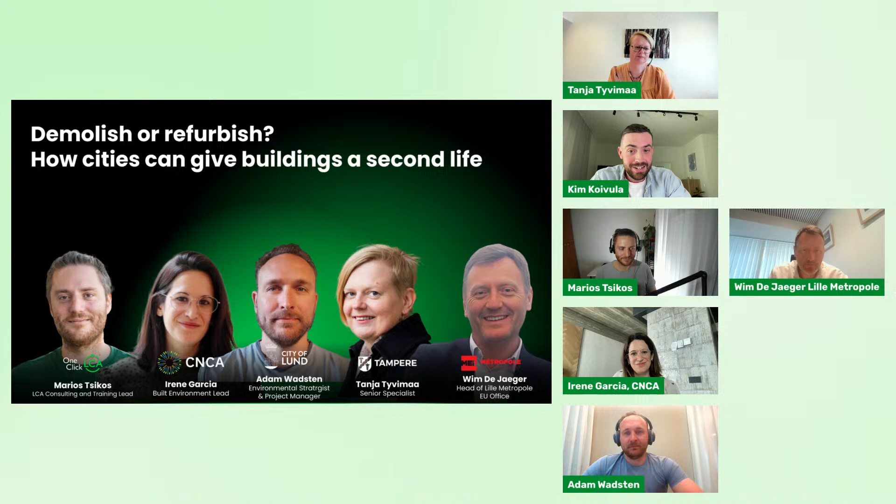Today, we're going to discuss how cities can give buildings a second life and talk about the different factors when considering demolishing or refurbishing existing buildings. We will also share the key findings of a report we've conducted together with CNCA and have a discussion around the policy outline of the report with all of our speakers. Now, to kick things off, we have Irene from Carbon Neutral Cities Alliance to give us an intro to this subject and set the scene for our upcoming discussion. Irene, please go ahead.

Hello, everyone. Thank you very much for attending this webinar. I'm Irene Garcia, Built Environment Lead of Carbon Neutral Cities Alliance, or CNCA, as we usually go by. We are an alliance of cities which have committed to cut emissions by 80 to 100% in the next 10 or 20 years, and we support them to achieve transformative action to help them meet those goals.

Next slide, please. You can see the list of cities listed below. Next slide, please. And we support them through peer-to-peer learning, policy development support, innovation, as well as communication and engagement training to shape the narrative towards transformative climate actions. We typically work with the climate directors and in areas that they identify as the priority to help them reduce emissions big time, and the built environment, obviously, is one of those areas.

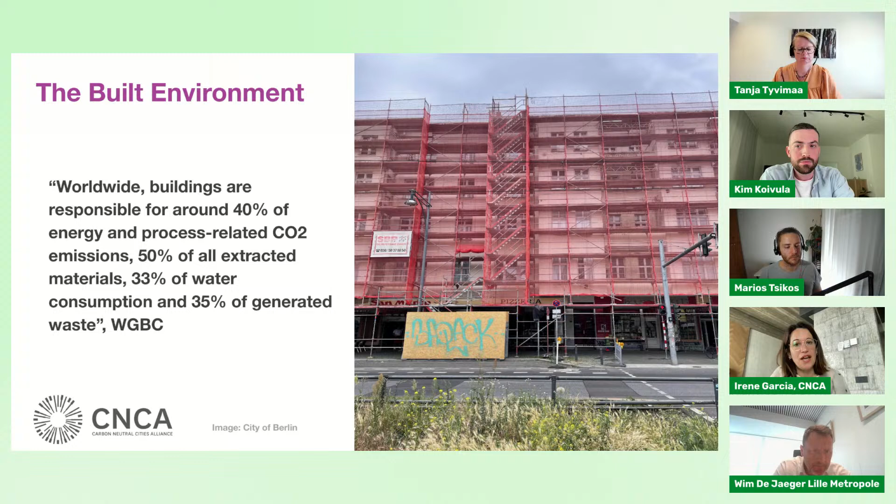So we need to make sure that renovation is not equal to demolition to achieve the rates that we need to achieve at large scale. And also, we cannot continue to build as the option, because we don't have enough carbon budget if we are serious about meeting the 1.5 degrees of the Paris Agreement. To give you an example, the city of Amsterdam, if we're considering all the indirect emissions from materials and construction associated, they ran out of their carbon budget in 2023.

Next slide, please. For this reason, because we really need to transform the construction sector, which hasn't been quite challenged yet, we need to change the whole business industry surrounding it. One Click LCA, CNCA, and Architecture 2030 developed a city policy framework, which we published in 2020. It was listing 52 policies that cities can put in place based on their different legal framework to reduce embodied carbon, and they can explore based on the cost efficiency how easy it is to inform, to implement. I invite you to go to that link to see which policies make more impact and more sense in your context depending on the policy mandate.

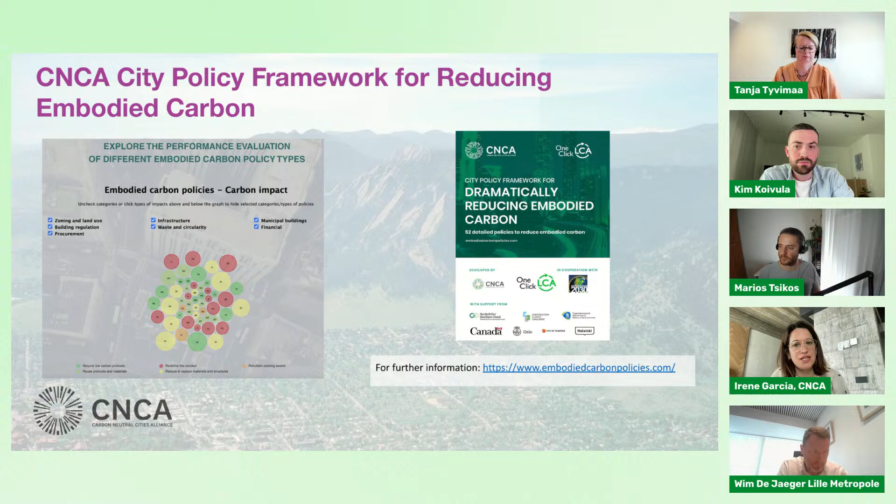Next slide. And here you can see we developed, in addition to this, the embodied carbon reduction measure typology, and listed here are the measures that have a larger impact to the lesser impact.

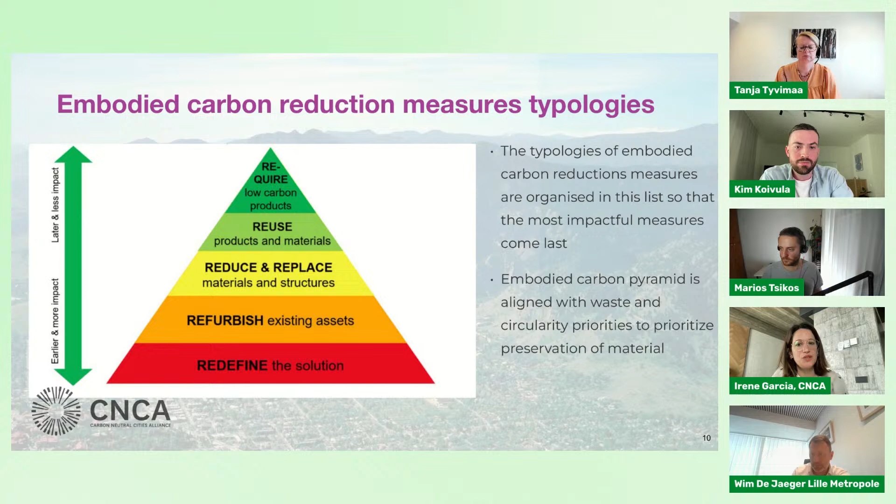What is clear is that it's not enough to decarbonize the environment by only selecting low carbon materials. Indeed, the first thing we all need to be doing is question the need for construction. It might be that you don't need to construct, and you need to redefine the solution by other means. For instance, if you need to develop a service, you can make use of underused space in schools, or map out vacant land and repurpose it for different uses. In this webinar, we will explore through the examples of Lund, Tampere, and Lille how cities are approaching this embodied carbon reduction pyramid and the policies to give buildings a second life and reuse material.

So in order to support them to put in place that framework, we launched in 2021, with the support of the Laudes Foundation and Built by Nature, a project in partnership with One Click LCA. We mapped out the different competencies of cities in zoning and land use, waste and circularity, public procurement, buildings and regulations, and identified the actionable pathways of different European cities, a total of 12.

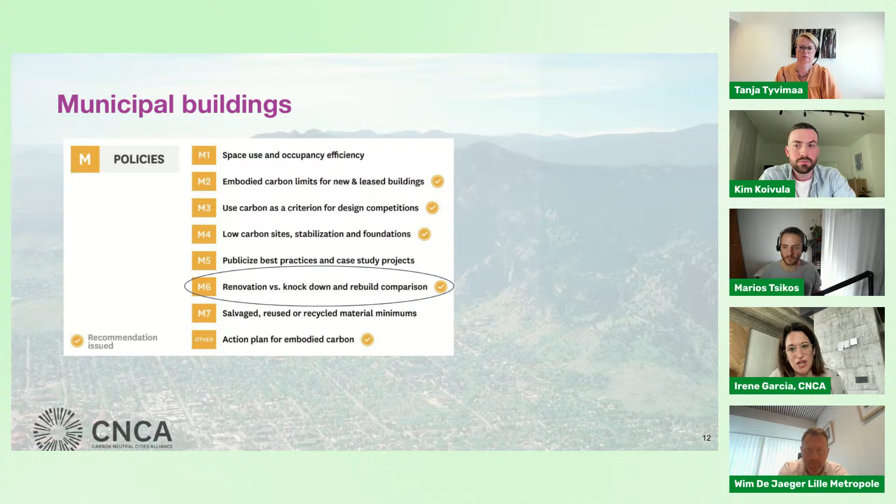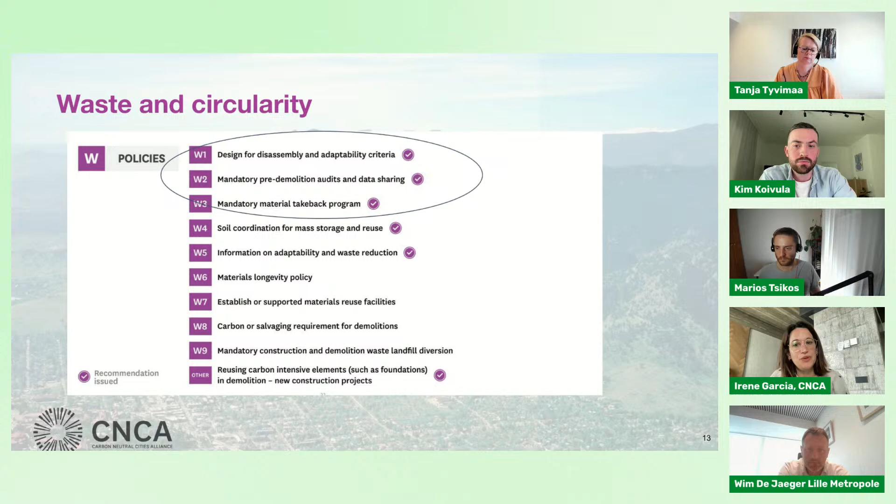If we zoom out in terms of renovation and refurbishment and how to prioritize and reduce the use of materials, what we see is that for municipal buildings, the top priority policy recommended to all of them was establishing a comparison between renovation versus demolition and new construction as an interlinked policy. In case demolition needs to happen, the recommendation was to establish mandatory pre-demolition audits and data sharing to help companies understand what materials are available and can be reused, as well as mandatory material take-back programs.

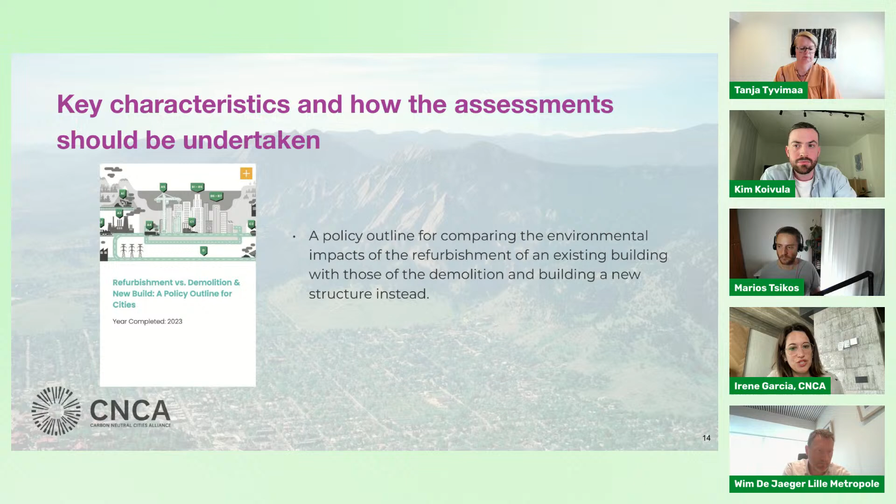Because there is a lot of methodology and guides coming up to help cities and governments reduce embodied carbon from new construction, since upfront embodied carbon is the highest across the whole life cycle, the benefits of embodied carbon reduction potential for refurbishment are often overlooked, especially as we need to be questioning the need for construction. This is why, in partnership with One Click LCA, we developed this policy outline to help cities and all stakeholders along the construction value chain assess the benefits of renovation versus demolition and new construction, with a methodology for whole life cycle carbon assessment and costs, including reuse and repair. I'll give the floor to Marios Tsikos to give a better explanation of this policy outline. But for any information, please feel free to reach out, I'll be happy to talk to all of you. Thank you.

Thank you, Irene, for setting the scene for our topic today. Next up, we will dive into our key report findings and the policy outline with Marios. So Marios, please go ahead. Thank you very much, Kim.

The policy outline we're suggesting is based on a comparison of a refurbishment option with a new build option from a whole life carbon point of view. This means we expect the developer to undertake a life cycle assessment for at least these two options and decide which one to go with on the grounds of whole life carbon emissions. Why do we suggest LCA as a way to compare these options? Because LCA is a reliable and repeatable methodology which allows a fair and objective comparison between design options, not just refurbishment versus new build. It focuses on global warming potential, the whole life carbon emissions as we call it. It takes into account both embodied and operational carbon emissions, and also allows for life cycle cost calculations and circularity assessments at the same time.

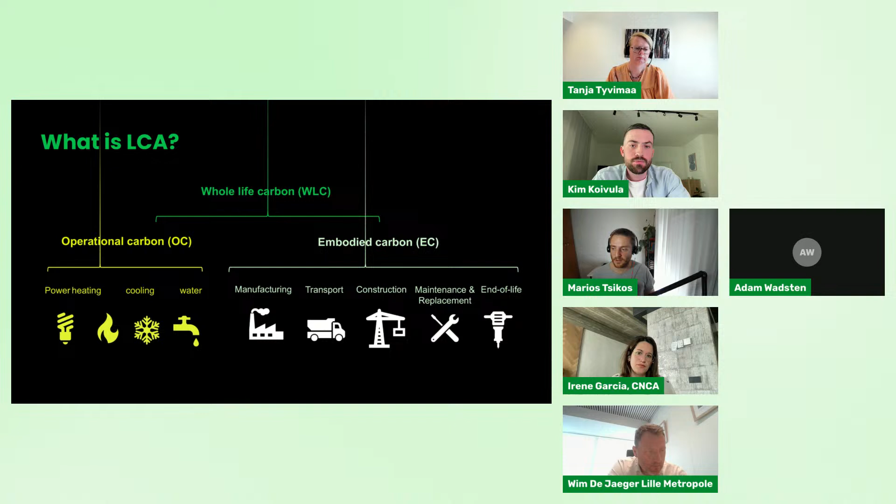Moving on to the proposed policy now, we're proposing that such a policy would include the following key requirements for all sites where there is an existing building. So first we start with a refurbishment feasibility study, as we call it, of the existing buildings and structures in order to find out if this existing building can be refurbished, how and for how long.

Once the refurbishment is confirmed as an option, then the policy requires that a comparative LCA is undertaken for these two options, with the results being submitted to the city. Depending on the final criteria that would allow the demolition of the existing building, if the comparison concludes to demolition, then this must be approved by the city through a demolition application and justification as well.

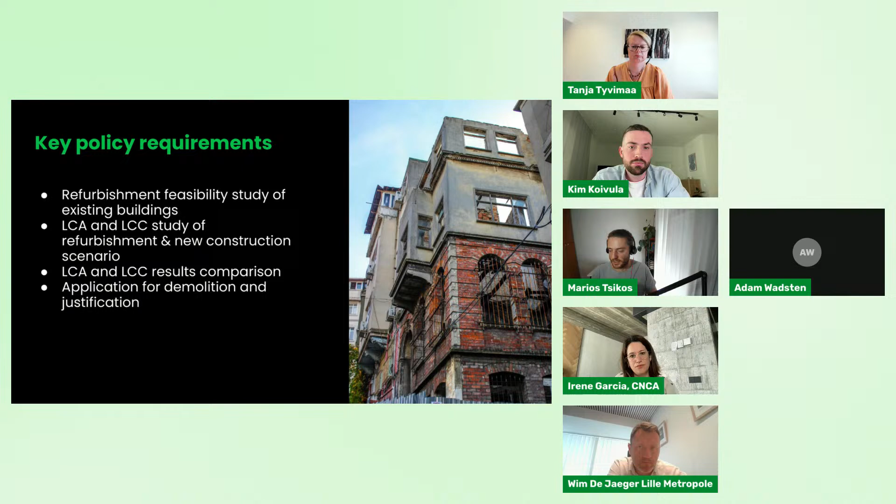Going into more detail now for the proposed feasibility study. At this stage, the developer must commission a site survey before any design work starts in order to identify if the existing structure can be reused and at what extent.

This survey should identify any damage and deficiencies in the existing structure. It should assess the remaining service life of the structure and suggest the remediation works required in order to achieve a minimum of 50 years, as we propose, of extension for the service life of the building.

The survey may also suggest that refurbishment is not a valid option on the grounds of technical challenges, health and safety risks, or significantly increased remediation costs. So, if anything like that is the case, then of course we should not be doing any refurbishment work.

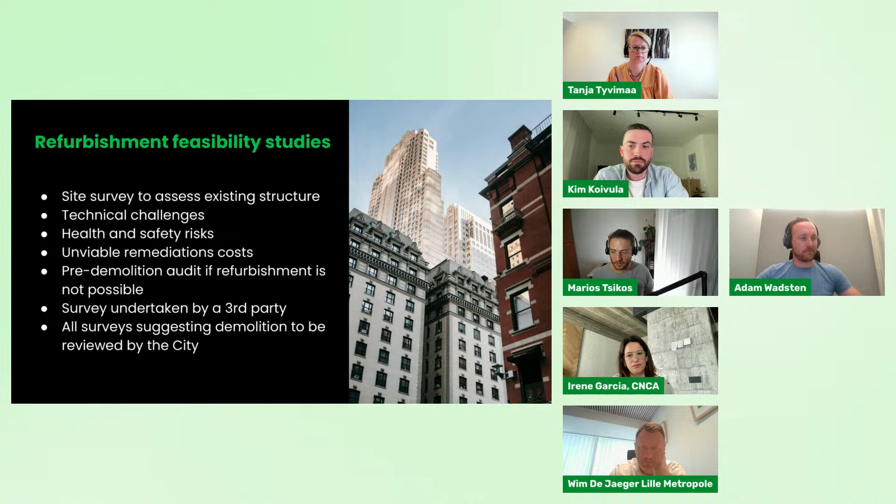Then a pre-demolition audit will be needed in order to identify the elements and the materials that can be reused in the new building. And this survey must be undertaken by a third party, and any survey that concludes the demolition must be reviewed by the city before the demolition permit is granted.

So there are a few possible outcomes after the feasibility studies, and here we can see a few examples of what these could be. In this first example, the existing concrete structure is fit for reuse. This is the outcome of the survey, and it has at least 50 years of remaining service life. This means that the refurbishment is a valid option and must be compared with a new build option as part of the planning process.

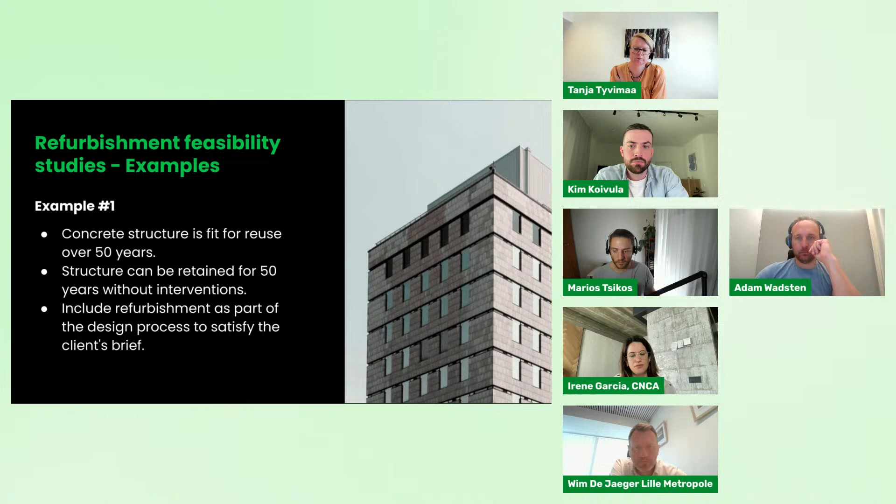In the second example, there is an existing steel structure, let's say, that requires some elements to be replaced and some strengthening in order to expand the service life for another 50 years. And these interventions are described and must be taken into account in the refurbishment option assessment when we compare it with a new build.

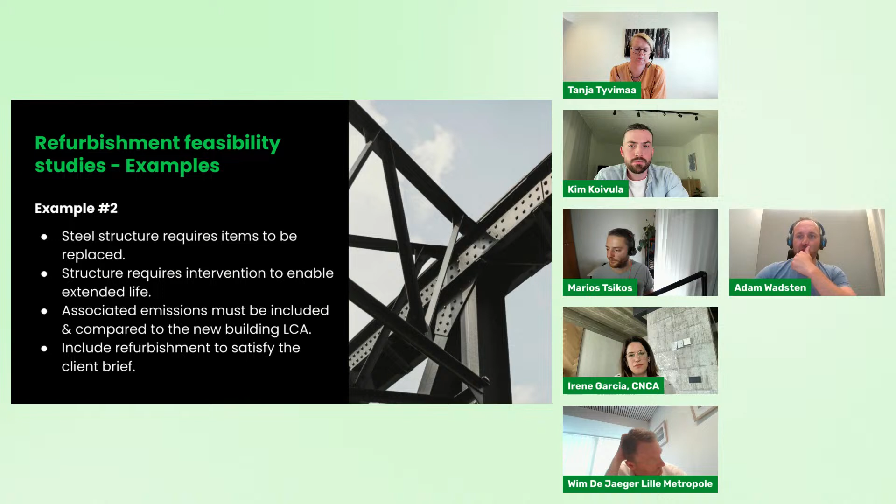In this third example, the existing structure has been heavily deformed due to ground movements, and hence it cannot be reused. The only thing that can be done in this case to preserve some value in the existing material is to do a pre-demolition audit and identify what elements and materials can be removed and reused later in the new building.

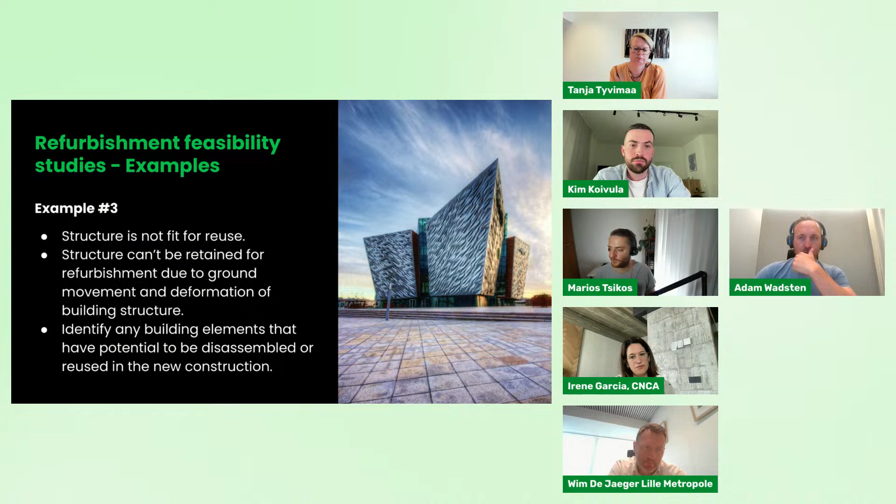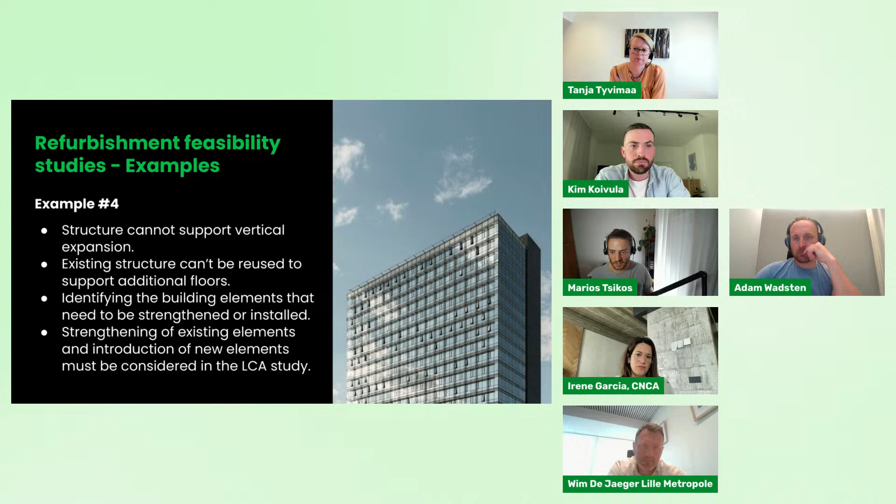In this last example, there is an existing building that, although it can be reused as is, it cannot support vertical expansion in order to maximize the site's potential. So the survey will highlight which elements need strengthening and whether this is feasible at all. Strengthening activities will need to be taken into account in the refurbishment assessment when we compare it with a new build.

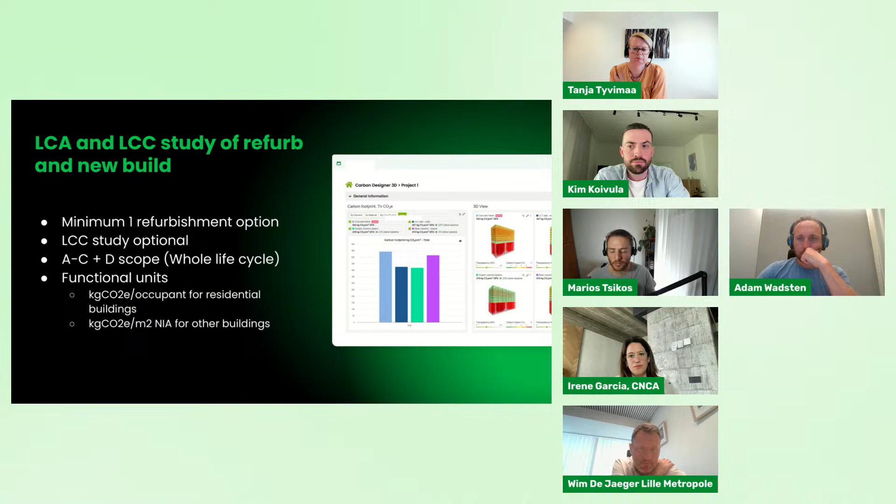So once the feasibility study has concluded that refurbishment is a valid option, then the developer must include at least one refurbishment option in their comparison. The assessment must be a whole life assessment, including all stages and all modules, and must report the results in kilos of CO2 equivalent per occupant in the case of residential buildings, or kilos of CO2 equivalent per square meter of net internal area for all other buildings.

The service life must be set to 50 years for all options to allow a simple and consistent comparison. So this is why we were including the 50 years extension of the service life in the feasibility study.

The option with the lowest global warming potential or whole life carbon emissions is going to be the preferable one, with some exceptions, which could include one of the options shown in this slide.

These could be that the new building contributes to densification of the neighborhood, which happens to be in a high transportation index or public transportation zone, as we could call it.

It could be that it happens on a very small site. Very small could be a definition provided by the city every time, because it can be different for different countries and different regions.

It could be excluded based on the owner's financial status, so we don't want everyone to pay the same when it comes to the transition to net zero. And it could be on the grounds of LCC costs or construction costs being much higher.

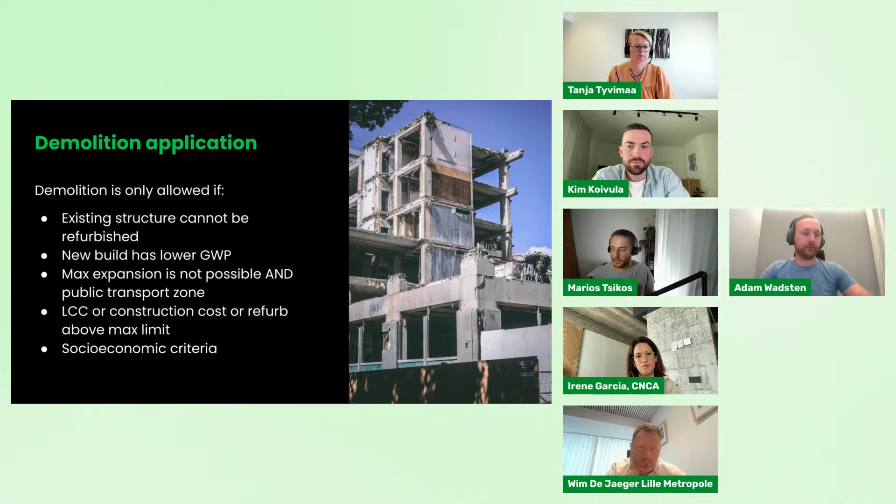And I believe with that, I will hand it over back to Kim.

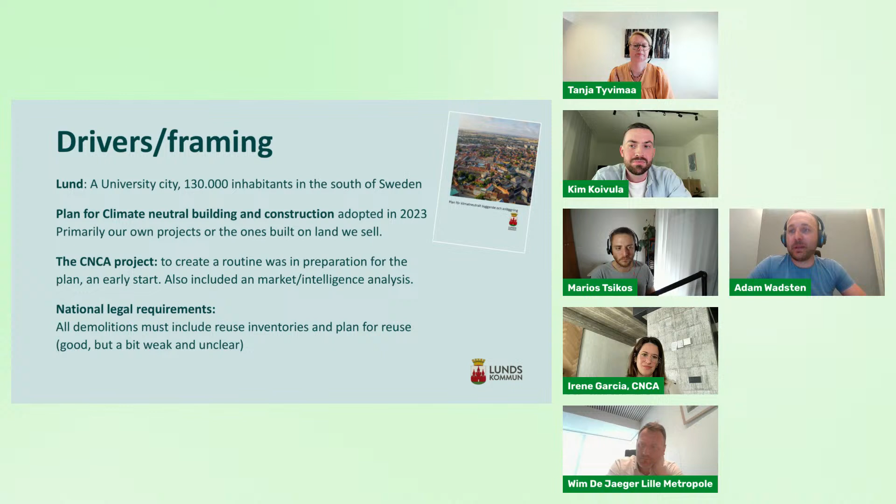Well, anyways, we're a small city in the southern part of Sweden, with 130,000 inhabitants. We had a newly adopted plan for climate neutral building and construction, and our inclusion in the CNCA earlier project was a focus on creating a routine to handle reuse inventories, which we had a law in Sweden, but we didn't really do it in a systematic way. So we had national legislations, but nobody really understood what it meant and how to handle it. You can change to the next slide, please.

Well, the routine covers maintenance, renovation, and demolition of buildings. It's a framework for our managers and project managers and property managers to get a systematic way of doing those reuse inventories. And also it includes how to prepare the knowledge gathering, so we know how the building looks and what we're supposed to do inventory of.

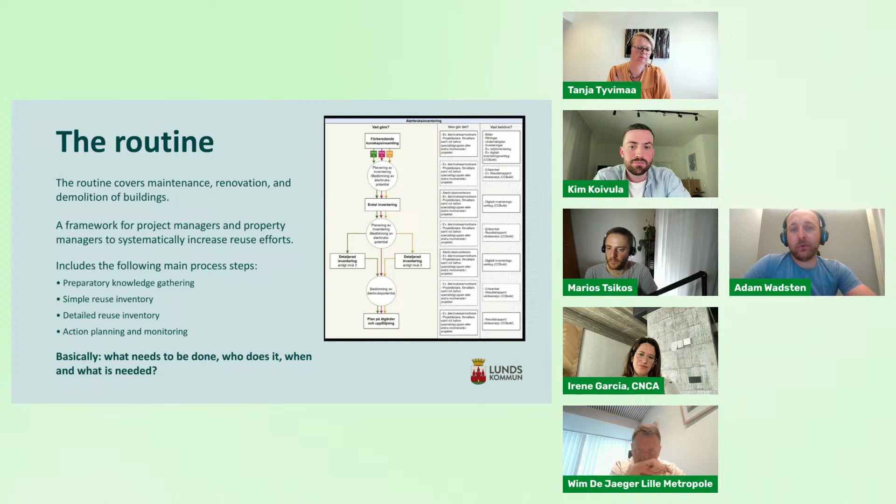And we also have different levels of inventories depending on the type of building and also the timing. We do a simple inventory in the beginning, and if we find it's interesting, we do a more deep dive. And also we include action and planning and monitoring what we're going to do with the materials after, but that's also a key point for us to work with more. So it's what needs to be done, who does it, when, what is needed for the project managers to have a systematic way to handle it.

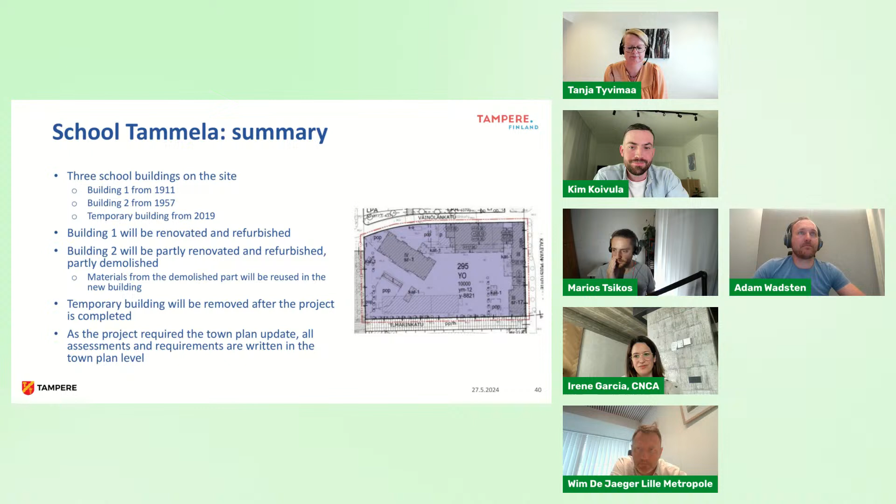Three different scenarios were studied for building 2: full refurbishment scenario, completely new building scenario, and partly refurbished, partly new construction. This is the option we selected. All those scenarios were compared and assessed together. We did nearly 20 different assessments during this analysis, including, for example, LCA, LCC, technical condition of all structures, historical value, indoor climate, and environmental assessments.

So building 2 has significant indoor climate problems, so it has been already closed for years. Full refurbishment is not really an option within this building. Based on all those assessments, it was decided to renovate the healthy part of the building and then demolish and rebuild the part where we had the most significant problems. And the application for demolition is mandatory in this case.

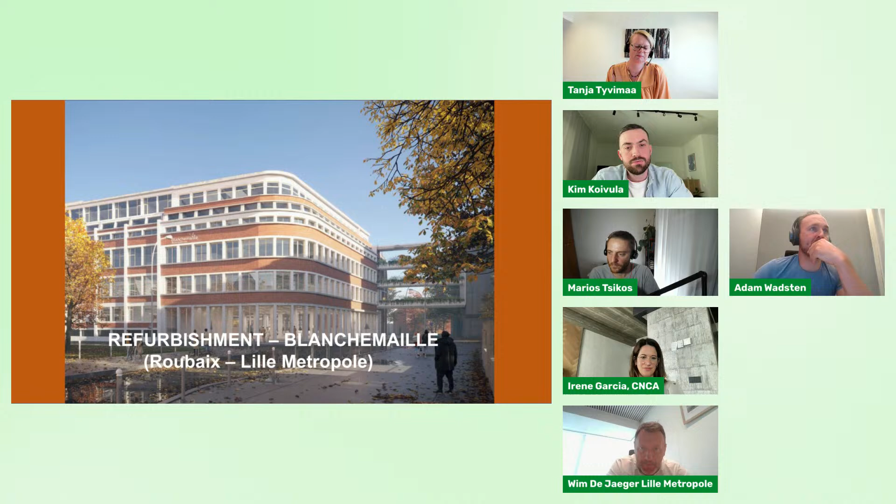Today I will talk briefly about our project Blanchemaille, located in Roubaix, one of the 95 municipalities of our metropolis. Roubaix is a city of about 100,000 inhabitants. It's the third biggest municipality of our metropolitan area after the city of Lille and the city of Tourcoing. So the site that we call Blanchemaille is a main urban renovation project for our metropolis.

It is about the refurbishment of one of the three buildings from the former headquarters of La Redoute, a mail order service company that stopped its activities on this site in 2017. Lille Metropole bought this site in 2019 in order to create a cluster dedicated to e-commerce.

The aim is to create a totem site, including the development of 13,000 square meters of tertiary floor space to accommodate incubation and accelerate the creation of startups and to host companies. The program also includes a business hotel, event space, and logistics spaces.

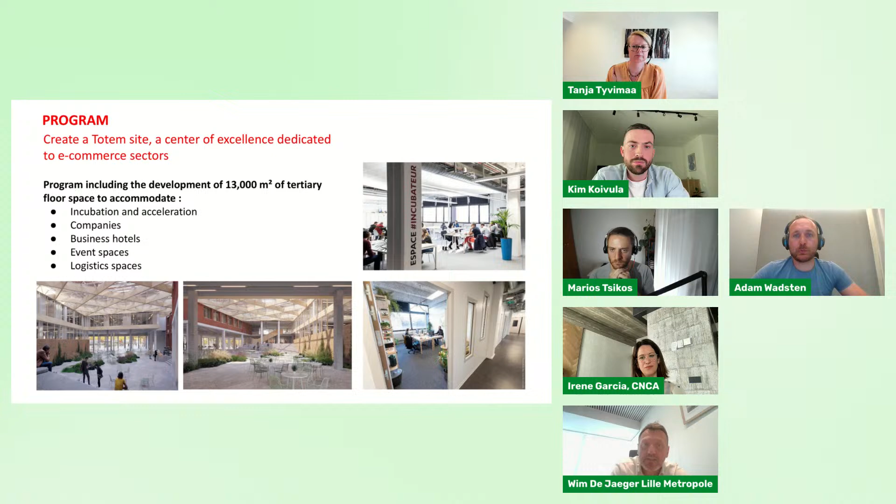From the beginning, the objective was to develop an ambitious renovation project with high standards on environmental quality, low emission, and low energy consumption. The project is certified HQE, high environmental quality. The French label HQE is the equivalent of BREEAM, the Building Research Establishment Environmental Assessment Method. In the framework of HQE, we received the excellent level on the conception part, and the challenge is now to maintain this excellence level for the construction phase of the project.

The project also respects a local pact on wood, so the aim is to use at least 30% of wood coming from France or from a perimeter of 150 kilometers, as we're located close to the Belgian border. We have other labels like Osmoz, a label about the quality of life, and the other main starting point of the project was the commitment to develop a circular economy project with maximum reuse of materials.

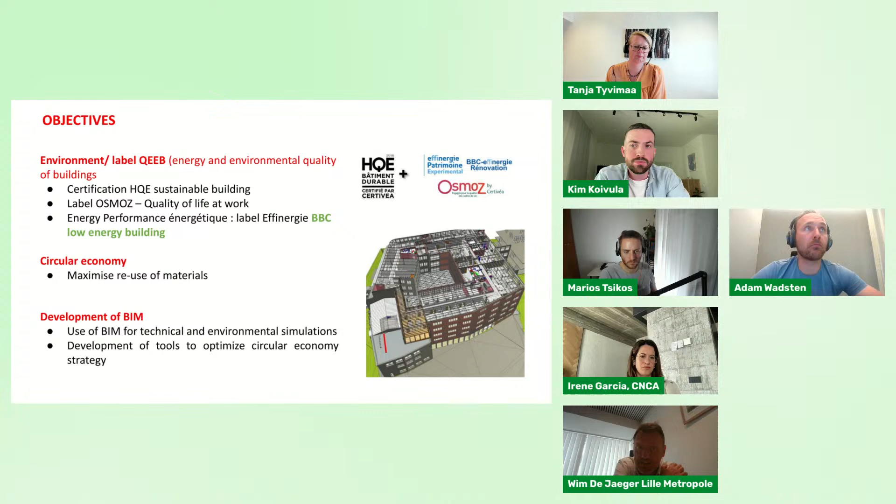So the project site is located in an urban renovation area dealing with problems like rather high unemployment rate and poverty. Therefore, the renovation of the building plays an important role in the renovation of the neighborhood.

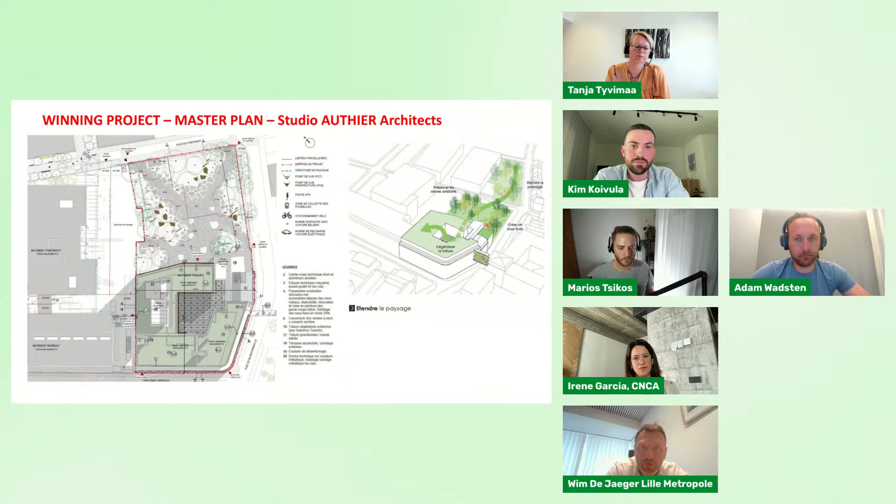Now we'll talk a bit more in detail about the reuse part of the materials. We reused as much as possible, different types of materials like partitions of the old office spaces, ceilings, external joinery, sanitary facilities, but also tiles, parquet flooring, doors, cable rails, etc. We benefited from optimal conditions for use because the reused materials could be stored temporarily in a building right next door, which saved us transport and storage costs.

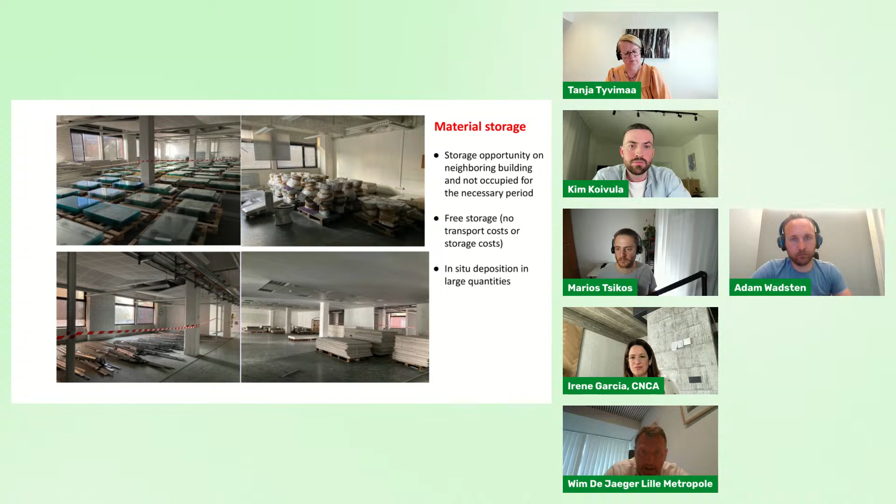You see several pictures on the reused materials and the storage on site. On the next slide, you can see a plan showing all the materials reused. We reused almost everything possible, like radiators, lighting installation, doors, carpets, wash basins, toilets, balustrades, etc.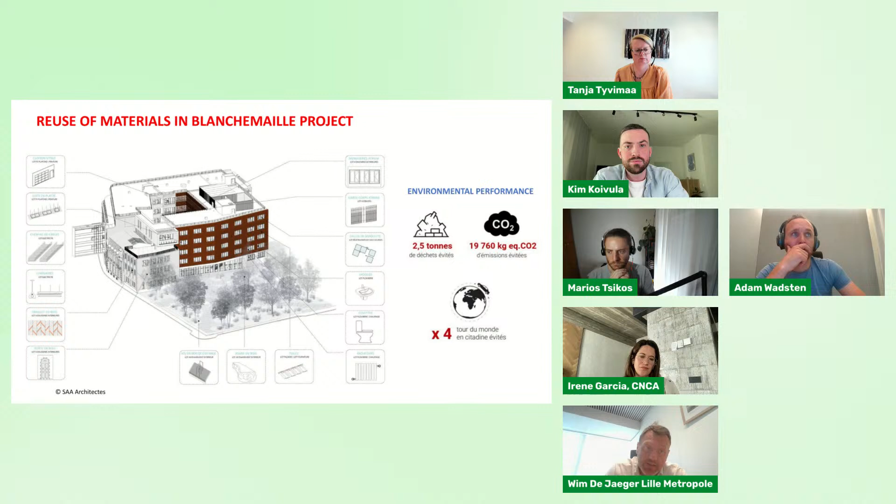2.5 tons of materials were recovered by associations, corresponding to more than 19,000 kilos of CO2 emissions avoided. The global environmental benefit of the reuse of materials on the scale of the project is much higher, of course. We estimate that about 400 tons of CO2 emissions are avoided thanks to the reuse aspects of the project. This global environmental benefit is the addition of reuse of materials in situ plus materials given to associations for reuse.

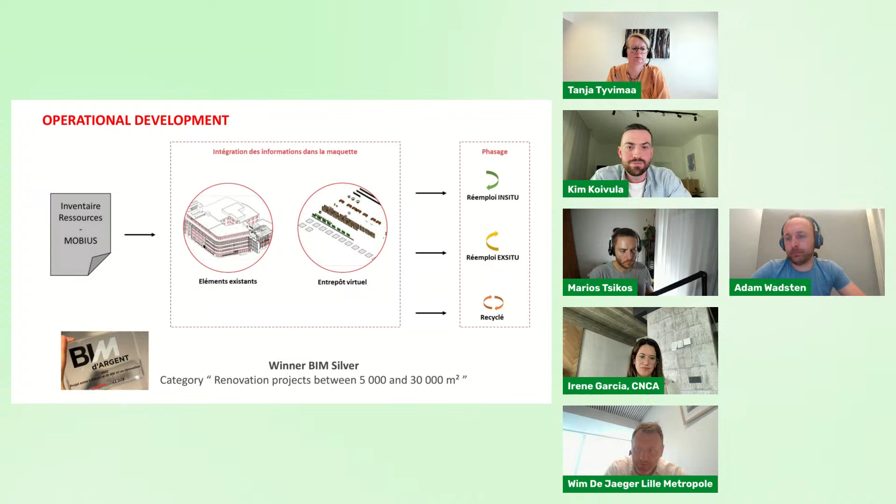Thank you, Wim, for a great presentation and overview from City of Lille's perspective.

Now, to recap a little bit: Irene has set the scene for the topic, Marios has given us our key report findings and the policy outline, and all the cities have shared their own experiences from refurbishment and demolition. It's time for some discussion.

I would love to kick things off with the first question to Adam from Lund. Adam, do you think this or a version of this suggested refurbishment policy can be implemented in your city of Lund? Yes, I think probably we can do it primarily internally, because here in Sweden we have very strong national legislation and very weak municipal possibilities. So implementing it for private actors within the city municipal borders is probably not possible—perhaps in a way, but not as strong as the policy outline is written, I think.

How about Wim? The same question to you as well—do you think this can be implemented in Lille? Yes, renovation is a very important aspect in our metropolitan area, for private and public housing, but also for the renovation of brownfields and industrial sites, as we have a strong industrial heritage. So this is strongly embedded in our climate plan, and this joins also the recommendations of One Click LCA when we work together in the framework of the dramatically reducing embodied carbon project.